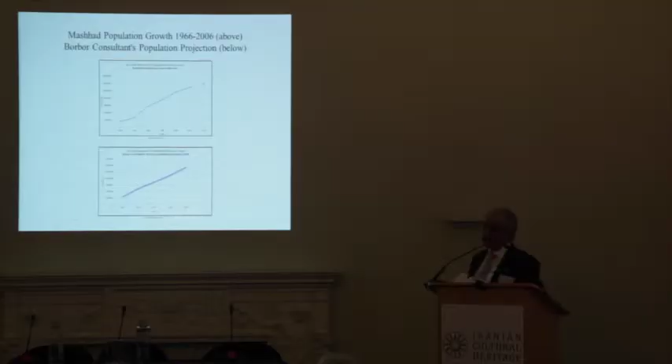I'm going to give you a brief run-through of our proposal. Our proposal included a huge research program. We had 50 people, specialists in various fields of demography, architecture, urban planning, sociology, economy, etc. And we pinpointed every single structure around the shrine of Imam Reza, and we analyzed everything, and the things that you're going to see from here on are in fact the results of our analysis.

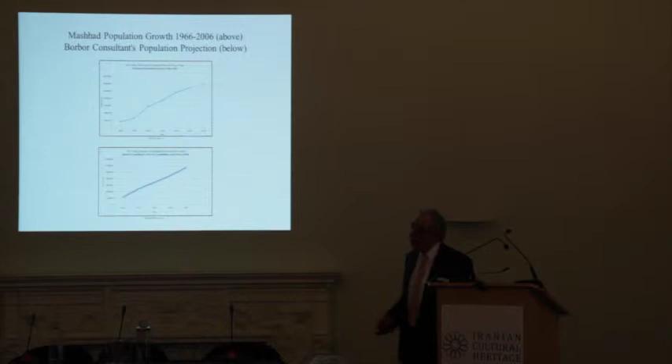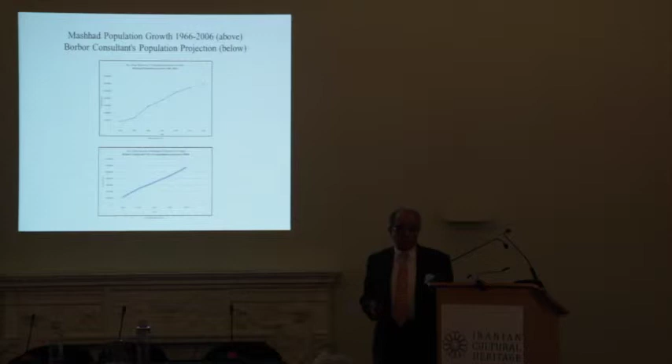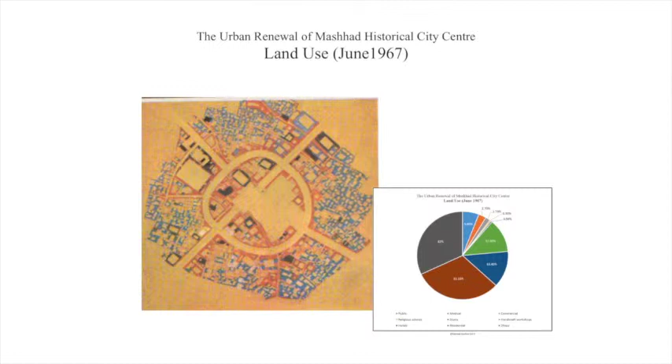And this is the existing land use of that area, converted to various percentages. Building ownership was, when we started the project, we thought most of the buildings belonged to Astan-e Quds, but we were very surprised.

Sorry, I'm terribly sorry. Thank you very much for saying.

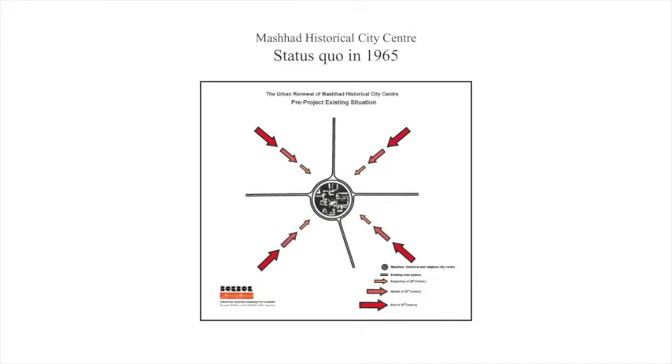Now, having done all this research, two or three things became extremely clear for us. The most important thing was that there was a huge socioeconomic force on this central area of Mashhad for construction, business, tourism, pilgrims, etc. And this was the big force which constituted the essence of our design and our proposal, in fact.

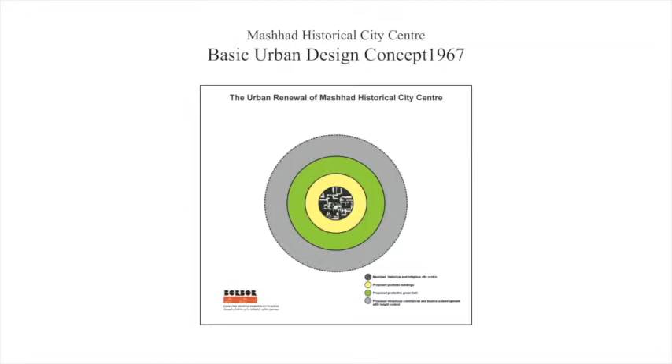Now, out of the research that we had done, we came to a very simple conclusion that you see: there's the central ring, which is the area of the sacred buildings. Surrounding that, we proposed a sort of peripheral buildings, which in some places were connected to the shrine area, because the reason for this was that

in the Islamic central areas around the Jamia Mosque or in places like this, usually the bazaars, there's some sort of central area usages which always go with these religious centers. And in our proposal, we wanted to keep this principle and this idea and have that. So we had a ring of buildings, in fact.

And then, in order to protect against the invasion of the central area through the socioeconomic factors, as you'll see later, we proposed the green belt outside of our proposed buildings, and then the gray area surrounding the green belt is an area where we proposed that mixed-use commercial and business usages should be encouraged, with height limits for the buildings only, so that they wouldn't physically overcome the character of the shrine.

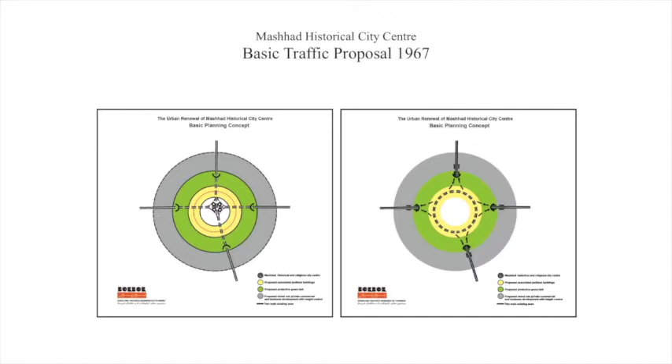Now, the second most important problem of central Mashhad is exactly these crossroads, which in fact culminate at the haram. And we proposed two underpasses for this area: one underpass which handled the cross traffic, the transit traffic, and another side which culminated in the haram area only and into underground parkings.

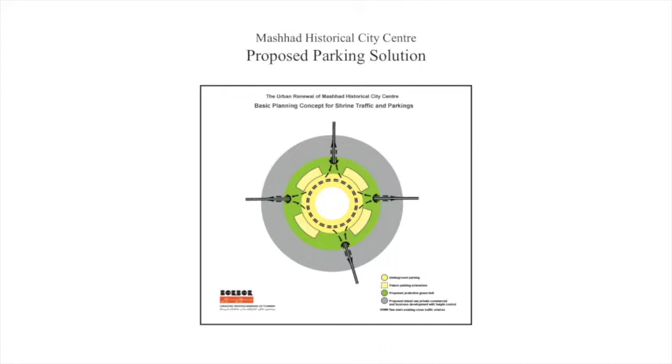And the whole of that area, the green, yellow, and the central part, would in fact become absolutely pedestrian. And the traffic, whether transit or culminating in the Haram area, would go underneath, with plenty of parkings underneath. And there again, I'll show you later how this has not been achieved now and the problems that they have right now.

Now, this is the Haram area parking, Haram area traffic, which culminated into a central road, and there were parkings under the buildings themselves, and also they could be expanded in the green area that we had foreseen in the future, without causing any problem, and they could expand as the requirement went on.

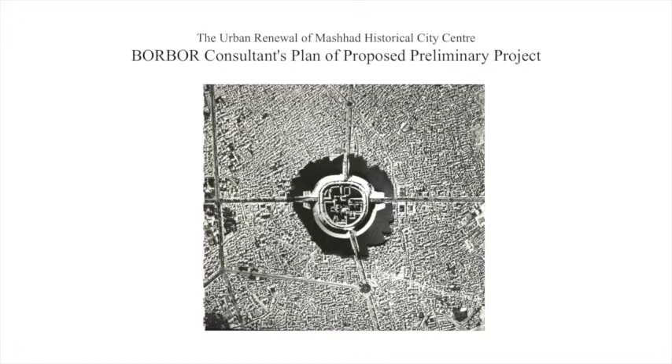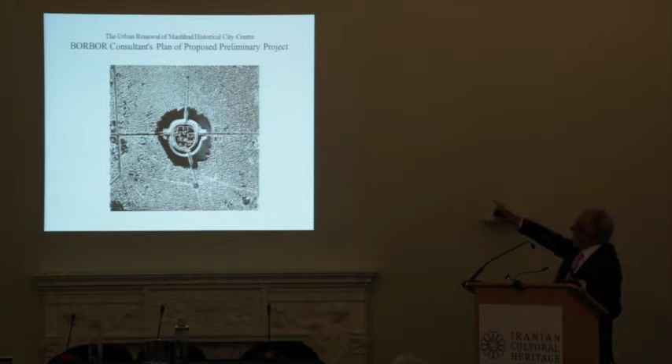This is the result of our proposal. In other words, you see the buildings in the center. The central part, of course, are the mosques, Goharshad Mosque, Haram, and the other buildings. And there were certain crossings which you see are the connections to these. And then the ring around it is a number of stories of buildings

in a way to engulf the classical buildings, because we envisaged all the time that connecting those areas with the rest of Mashhad would always be a problematic thing, and the forces would infringe eventually on the central area.

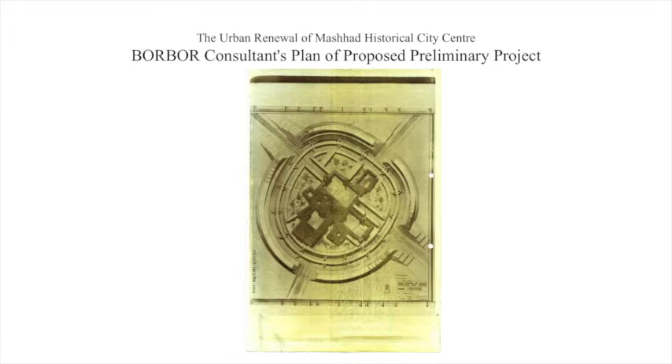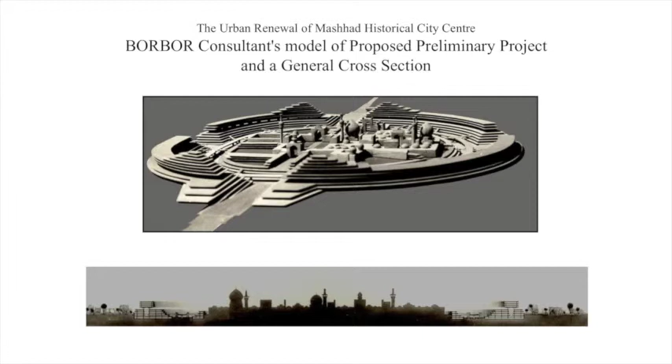And this is a plan, and you see in the center there is a pedestrian walkway going all the way around with connections at various levels. And so the whole area would, in fact, become a pedestrian walking place. This is our model of the area. You'll see how our buildings surrounded the shrine area, sort of framed it. We planned in a way to frame that area.

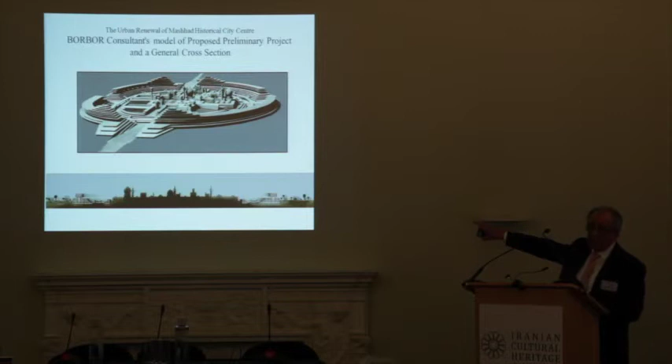And the cross-section at the bottom, we especially put that to show that the heights of our buildings in no way interfere with the heights of the actual classical buildings.

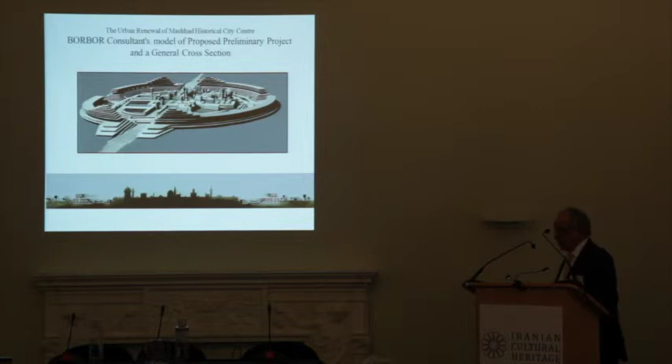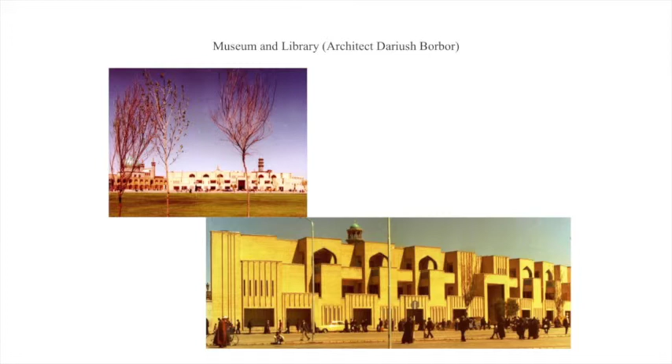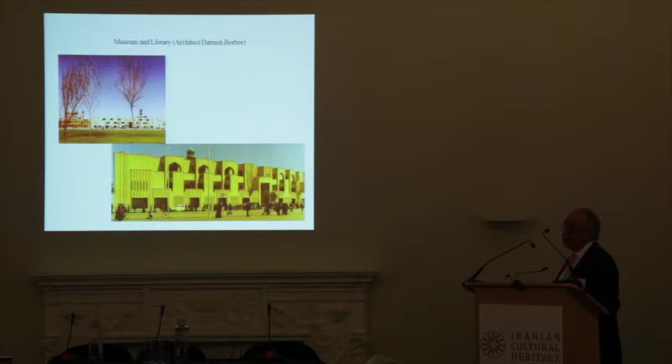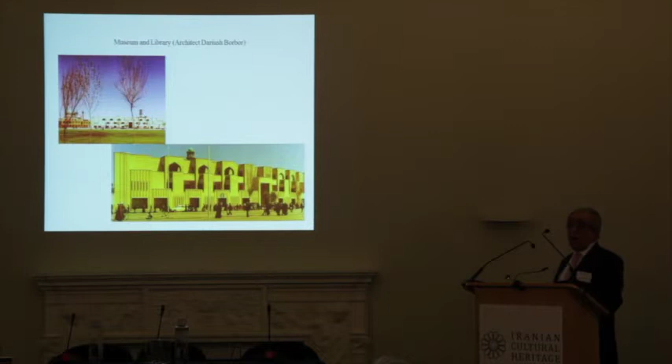This is the new Mashhad museum and library that we designed; unfortunately, the actual library exists, but the facade doesn't exist anymore. And we spent more than a year studying the facade in order to make a modern building which harmonized with the surroundings of the shrine.

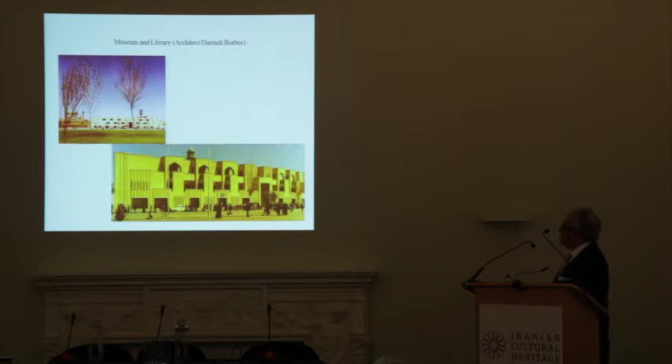And this was, in fact, a small section of the internal ring that we had proposed. In other words, we had foreseen that the internal ring would be of more or less this type of architecture.

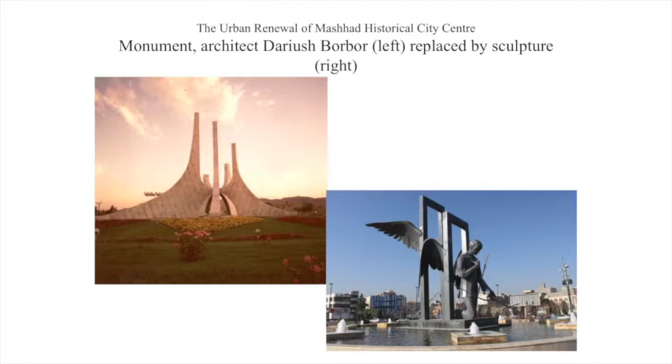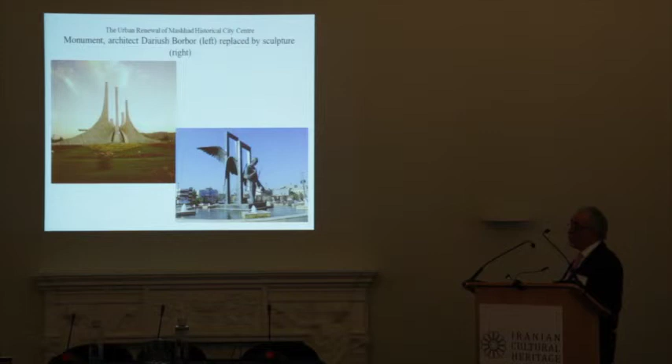Now, this is a monument. This has nothing to do with the actual shrine area project, but this was a monument that we built in Mashhad, and it was there until a couple of years ago. And finally, a couple of years ago, they decided to demolish it.

And they made various excuses of why they demolished that. And they replaced it with this iron fairy that you see at the bottom. So it is not only that ancient monuments are getting destroyed in Iran, but even modern monuments are being destroyed in some ways.

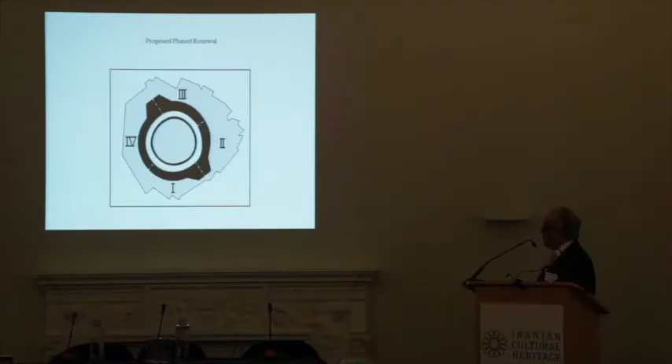Now, we had divided the area into 4 phases of construction. I hope I'm not over too much. I'll try to go very quickly.

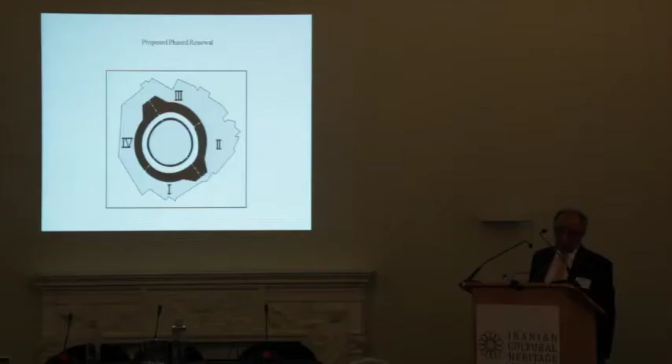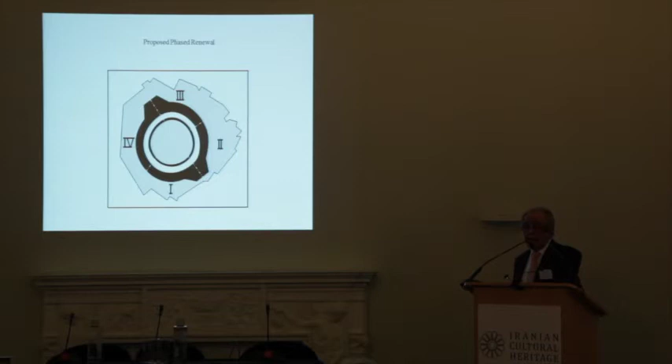4 phases of construction, and we had planned it in a way to try and create as little problem as we could for the people who had businesses there or residences there, etc. And consequently, we were going to start in a very small area and then transfer the population of a bigger area to that, and so on, and we would continue to do so.

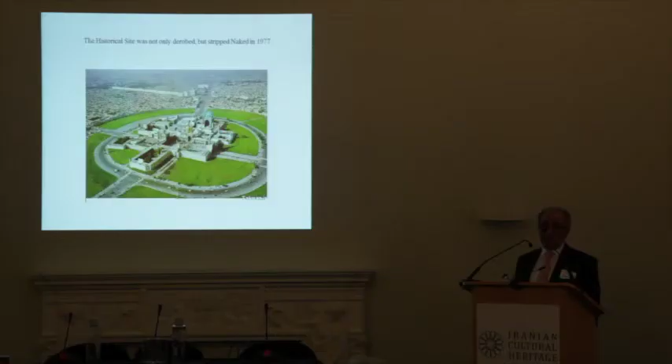Unfortunately, this phasing of our program didn't work, and just a few years before the revolution, the Naib Tawliya and Ostandar of Mashhad, who was Mr. Valian at the time, they decided that they're going to just knock everything down surrounding the monuments. And then Mr. Valian told me one of these days, well, I don't know how long I'm going to be staying as Ostandar here, but I'll knock it down and maybe somebody else can come and rebuild it.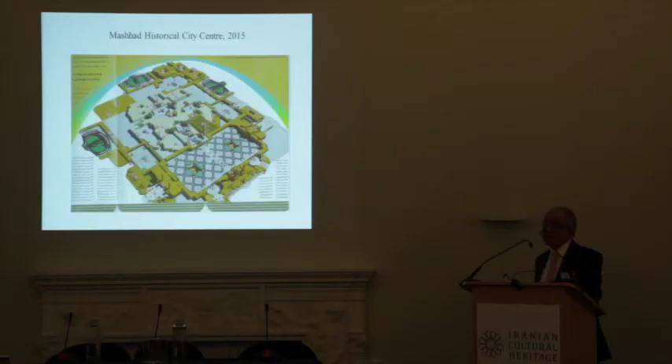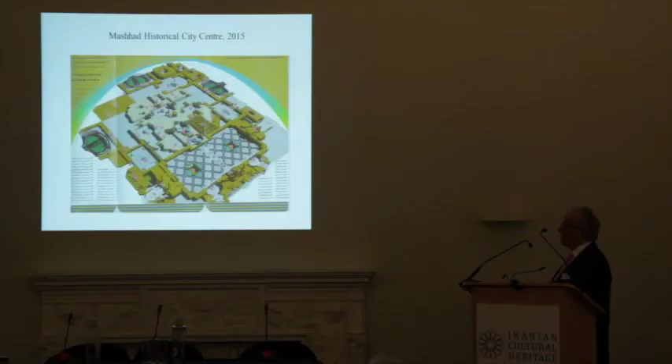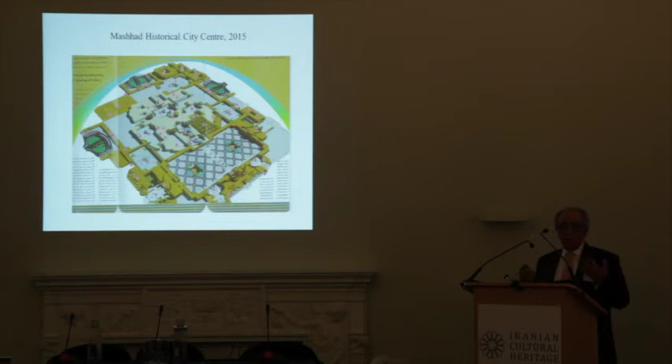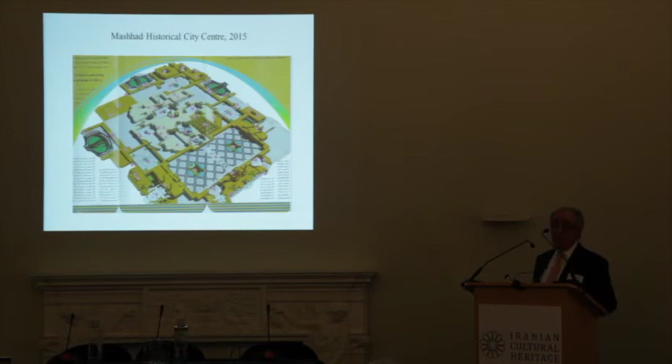And a lot of the buildings in the haram area, haram itself and the Gohar Shad and other surrounding buildings, a lot of the old tile works are changed, the new tile work has replaced them, unfortunately. And this is the Mashhad city center as it is today. They have built huge sahns or courtyards around the shrine, and these are so huge, and the surrounding walls with mosaic decoration are so overwhelming and so overdone that the Masjid Gohar Shad and the haram is just a minute thing over there.

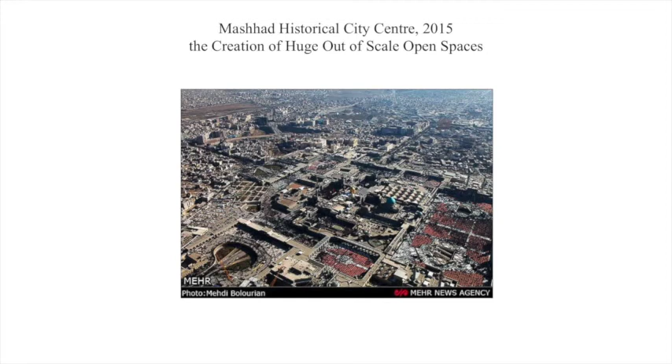This is an aerial view of the same thing, and you see at the bottom there's a ring there, and that is where they have taken the roads underneath. Now, the problem that they have encountered is that they have only partially executed our project. And that is that they have mixed the cross-traffic with the traffic that culminates to the haram. And they've built 3 or 4 parkings underneath, and they've closed 3 of them because there's been such a huge traffic congestion, which we had foreseen, that they have had to actually close the parkings.

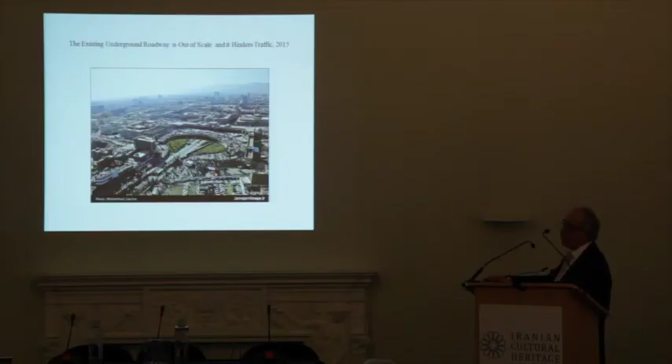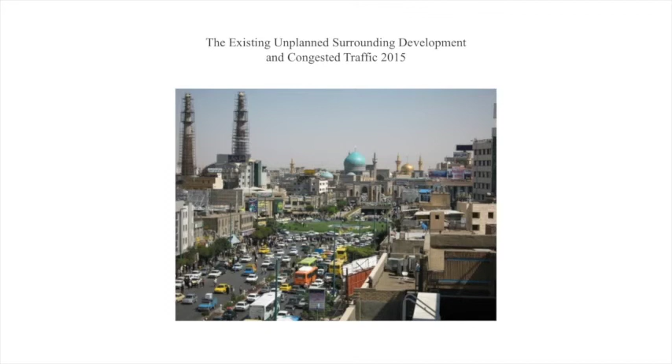And these are the loops that you see. And even physically, they're so huge, and they've exaggerated these in such a way that they overwhelm the other buildings of the area. And this is a good picture of how dramatic this tunnel entrance is, which would only be a simple tunnel entrance. They've made a huge feature of it, and you'll see how the traffic, the people, and so on are all mixed up together. This is the congested parking, and the traffic area which goes underneath. And this is one of the roads that leads to this place.

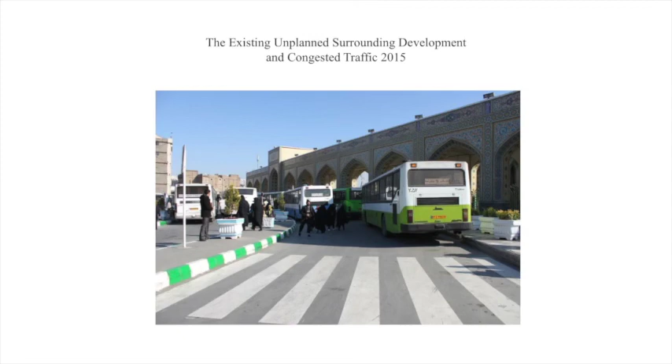And you see the hodgepodge of construction, there's nothing which matches another thing. And it's just mushroom growth. And this was exactly what we feared, and unfortunately it happened. And that's why we put that green belt around, so that this wouldn't happen. And you see, they haven't managed to separate the traffic and the pedestrians. I've taken some of these photographs a couple of weeks ago when Mashhad was very calm in the pilgrimage periods and so on. You just can't move either by car or on foot.